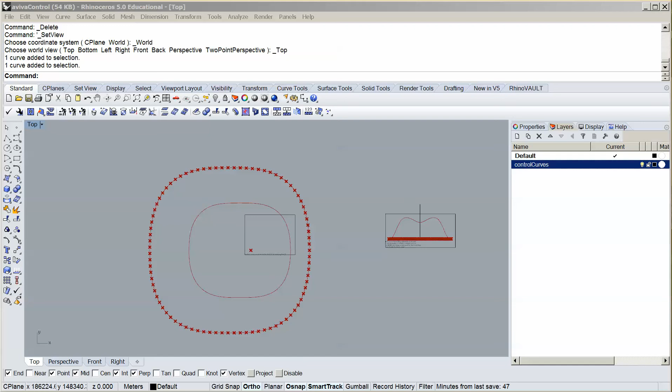Okay, so this is where we're aiming to get to, is that we want to be able to define a superellipse with a certain number of points. So what we need to think about is we're going to be working as though we were moving around in an anti-clockwise way. Each point is going to be a point on the curve, and we want to be able to calculate what is the angle between 2 points and the center.

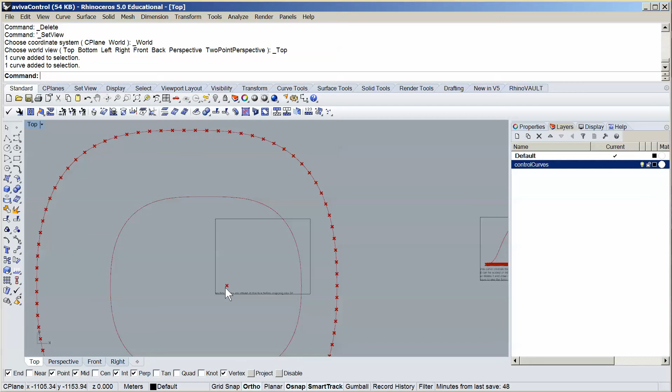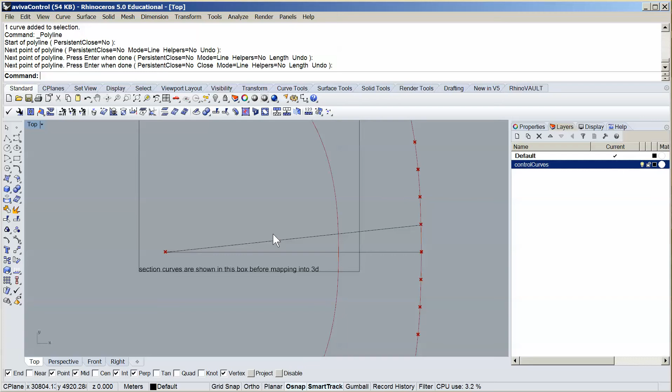So if I was to draw this now, we're interested in calculating, let's see here, we'll just roughly draw it in. We want to know what that angle is. So if, in our model, we're defining 52 points all the way around, what's that angle going to be? So let's think about how we can start to define that. Let's just pull back the script.

So we're going to make a new parameter. This time it's going to be a double. We're going to call it increment. So it's the angular increment as we move around the circle. And we want to say it's going to be math.pi. So what we're doing here is we're actually using a built-in library of mathematical functions. So we can say math.pi. This exists inside the script.

We need to multiply that by 2. So this is an angle in radians, math.pi times 2 divided by the number of points, and that gives us what that increment size is. So if we want to know, as we move around the circle, what is the current angle, we're also going to need another parameter that we're going to call theta. This is our total angle. So this is the angle that describes exactly where we are.

We're going to set it to 0 right here, and in order to calculate theta for each of our steps, we just need to say it's going to be i, which is the step number, multiplied by the increment. So that will give us the angle. So let's just think about that. Let's just click OK here. So switch back to my other model.

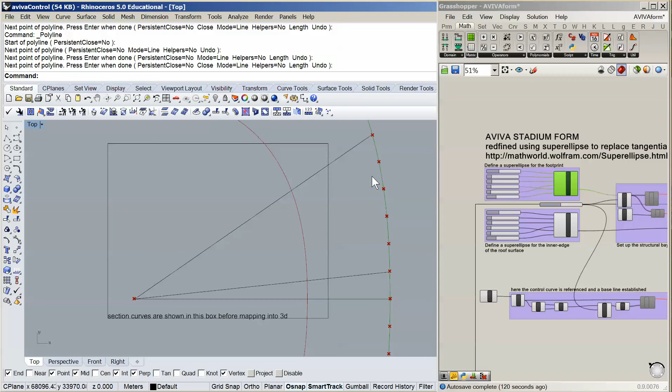So this means that right here, when we're at step 0, the angle is 0. This would be step 1. But then what we're trying to set up is something that gives us the ability to say, okay, what now is this angle here? This is 0, 1, 2, 3, 4, 5, 6. So we say the increment multiplied by 6, and that gives us the angle.

So we've got the angle there, and we've got this thing called count loops that we don't really need, so I'm going to get rid of it for now because that was just a test. But before we go in and do the superellipse, let's just imagine all we want is a circle. So how do we define a circle in terms of points, where we have a set number of points, and let's say r is our radius.

So here's a good reference. x equals r cos t. In this case, t is our theta, the angle, and y equals r sine t. So we can use an equation like this. So let's just have a look how we would set that up. So we first of all need 2 new parameters. One is going to be x, and the other one is going to be y. We have to set them both to be 0 to begin with.

So in here we said x equals r times math.cos theta, y equals r times math.sin theta. So that's our version in C# of this parametric equation. x equals r cos theta, y equals r sine theta. So we're using a library of mathematical commands that give us access to sine and cos.

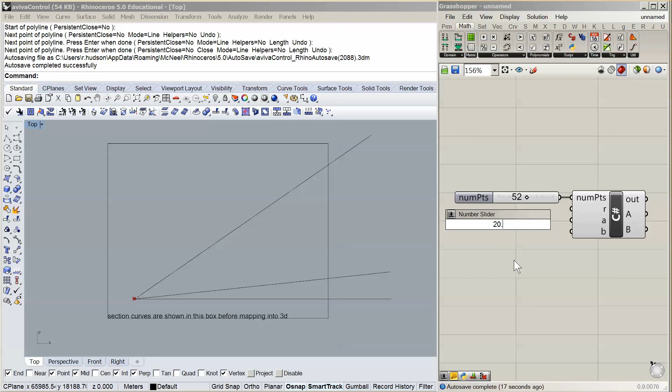So now you can see here that b coming out, they're all 0 because we don't have a radius just yet. Let's set the radius to be 20.55. Let's just find our points. So this is a scale in meters. So right here you can see we've now just written a little script that generates points in a circle, and we're going to continue in the next video to adapt that to become points that are a superellipse.